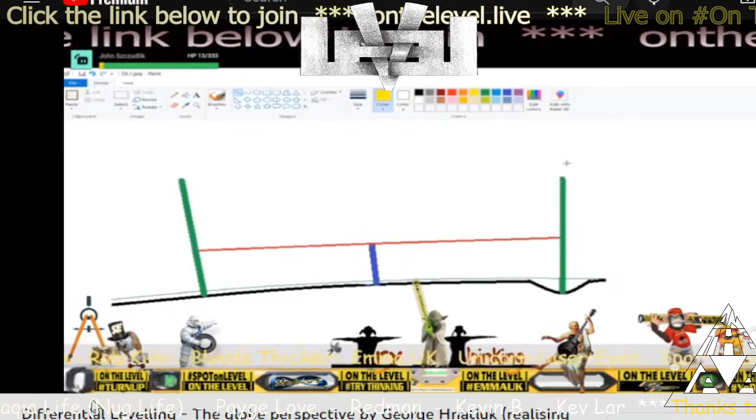Okay, so what we have, the green are our two rods, our grading poles. They have marks on them. In the UK, I don't know what you use for graduations, maybe 5 millimeters. What are your grading poles marked at, finest resolution, Bev?

On the backs of them you get millimeters, but if you're after really accurate stuff, you've got millimeters on the back. So they will grade it down to a millimeter? Yeah, but really close, you have to do that. In the US, they're usually centimeter or half centimeter, or generally marked in hundredths of a foot, which is about 1/8 of an inch.

So, okay, these are our two grading rods in green. The auto level is the blue in the center here. And in differential leveling, the easiest way is you set your auto level midway between the two poles. You don't have to for differential leveling, but by putting it symmetrically between the two poles, the curvature of the Earth drops out, and you also end up minimizing refractive effects, and I'll tell you why that's going to happen here in a bit. So you have your auto level set up, and now you can spin the scope around.

You can shoot in this direction to the left, which we call the back sight, or spin it 180 degrees and shoot in the forward direction, which we call the foresight. Now, with the auto level set up and the compensator moving freely, you shoot a straight line, and you are guaranteed when you look through the scope on the back sight to the left pole and read the mark there, then rotate and go to the foresight and read your mark on the pole, that these two marks the auto level is sighting are at the same elevation, or at the same level.

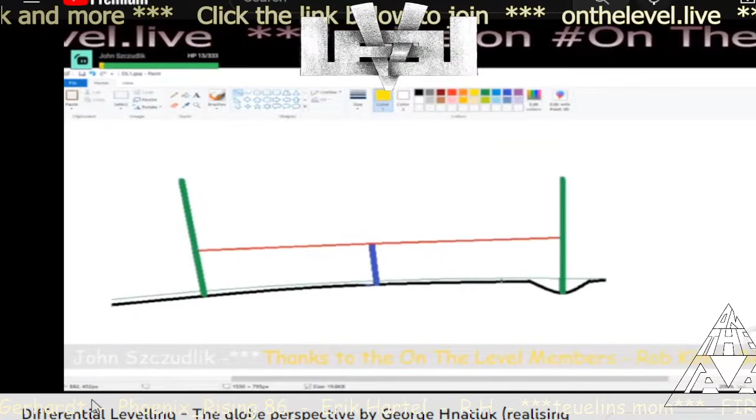Now, what I'm showing here in black is, let's say, our ground. It has a little depression here, a little dip, but this is our ground level. Now the thin green line is a level line, just above the ground. This would be, say, if you laid a hose along there. I know this is going to bother you because it's curved, but this is a level line on the earth, such that if this were a hose and you filled it with water, the water would just sit in the hose. It would not flow. Even though you think it's on a hill or whatever, that's not the way it works on the earth.

Is everybody getting this? Like it's the first time I've interrupted. I don't want to interrupt George, otherwise Blue Marble Science might say I'm spoiling the flow. But this is George going over his way of solving the horizontal paradox.

Get into any conversation with anybody about how surveying techniques are actually done in reality, and this is what the Blue Marble scientists do. I'm pretty sure George must have done this for Blue. Blue sent George over to help Mobius out. This is George showing Mobius how differential leveling works on the globe model. We all know how it works in reality, but this is George going over it on the dogmatic globe model.

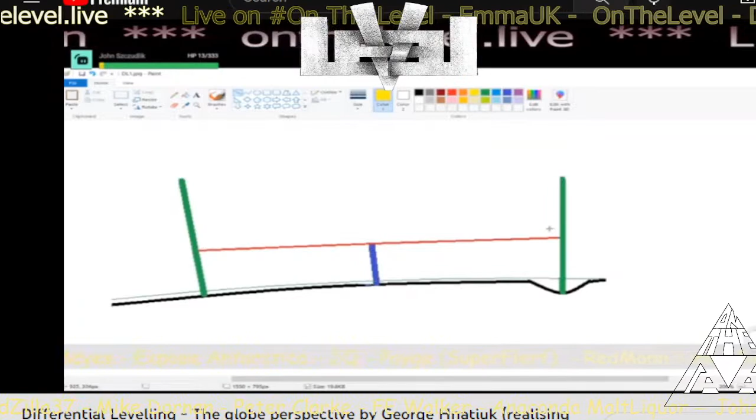I'll let him continue. That's level, right? When you shoot these two marks on your pole, if I were to say, see, measure the distance shown in yellow from where the auto level is sighting on the pole to a level line on the ground.

And I look on this one too. The distances are guaranteed to be the same, even though the Earth curves away from the auto level in both directions. The fact that the auto level is in the middle, we get the same drop distance on the right here as we have on the left here.

And what that does is, in differential leveling, this is a differential. We're comparing one side to the other side. And we are guaranteed by symmetrically placing the auto level in the middle that the drop distances to where it sights on the pole is the same on both ends. So the Earth curvature ends up not being an issue. It drops out of the equation because we are guaranteed that these two sights, these two marks, are at the same elevation or the same level.

It doesn't matter whether you're on a flat Earth or a curved Earth or whatever, because of differential leveling. That's the beauty of differential leveling, is the Earth curve drops out and it doesn't affect your measurements at all. So you get that? Earth curve just drops out. So remember that, when using differential leveling with the horizontal plane, Earth curve drops out.

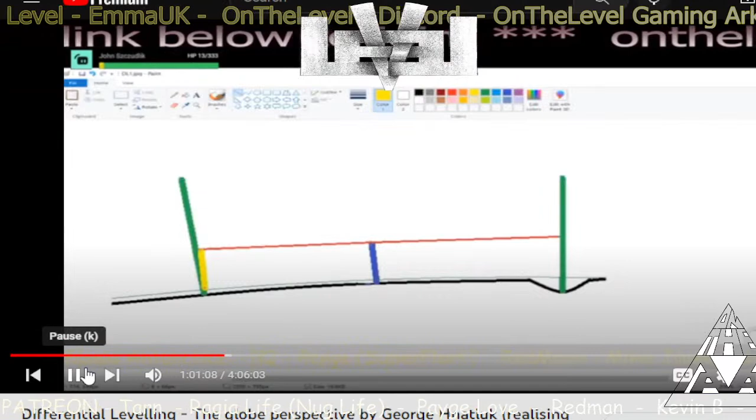The other advantage of doing this is that when you're sighting, say, in the back sight, the amount of refraction that you pick up is the same as the amount on the foresight because you're symmetrically placed. The atmosphere changes the same in both directions. So if you pick up refraction looking on your back sight, you're going to pick up the same refraction on the foresight and it cancels out. So in differential leveling, you have two advantages: you minimize refractive effects and the curvature of the Earth does not affect your measurements.

Now, let's... okay, so I'm pretty sure everybody's heard this one before, but George is just adding another one, that if you turn around, you can get rid of refraction too. They cancel each other out. Yeah. Same both ways, and the error cancels.

Blue Marble's confirming it. This is exactly like it has to work on the dogmatic globe model. Thank you for joining us, Blue. Yes, Kevin says.

Okay, here we go. Refraction cancels out. Brilliant. Magic trick works. Yeah, it's even if you've got like refraction going down in that direction and a refraction going down in that direction, they both just cancel each other out. They're both down, down and down. Just makes it normal or something. I've not got a clue.

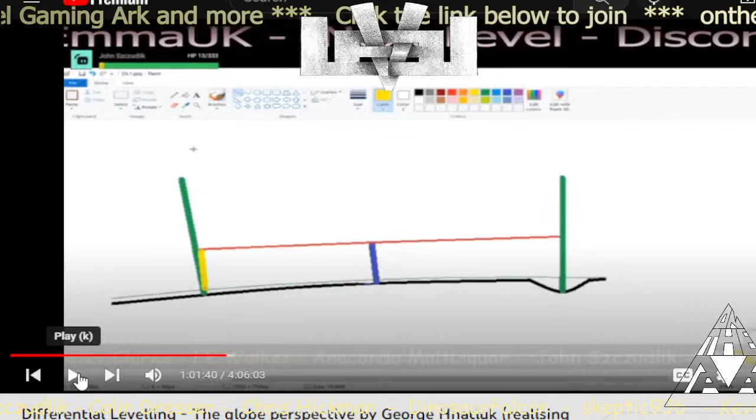So yeah, 32 times scope auto level. Right, here we go. Let's look at... any questions on that?

Hello? Have you got a fish tank in the background there, George, or something? A fish tank? Yeah, what do you mean? It just sounds like you've got like some water filling up or something. Is it? Oh, you mean the noise? Yeah, yeah. Oh, that was the furnace fan kicking on. Sounds like it turned off anyway. Mm-hmm, yeah, it's off.

So are we good on that part now? Well, I'm just going to reserve all my questions for later because I don't want to interrupt the flow. Well, you can at this point before I bring up the next graphic.

Did you say it didn't matter about the level being out of adjustment or something? Oh yeah, if your auto level is out of adjustment, you are guaranteed that when you do a backsight and a foresight, that you're going to hit the same elevation on both. Now, you don't want to do that. See? Even if it's out of adjustment, it's the same. It cancels each other out. It's brilliant, this. Just turning round. Doesn't half cancel loads of stuff out. Gets rid of curvature. It means you don't even have to set your auto level up or anything.

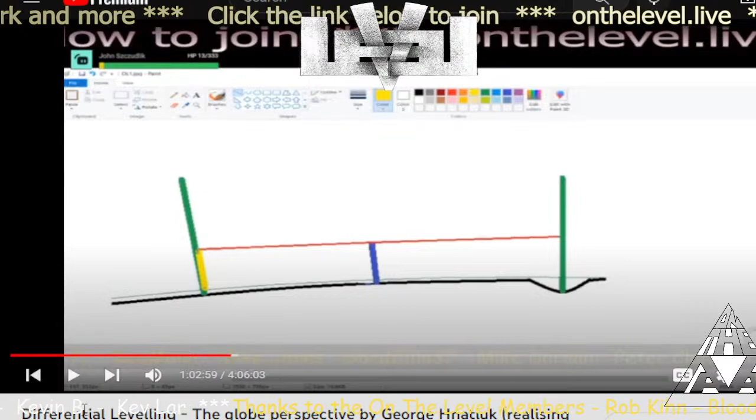Maybe you should turn around auto level many times. Yeah, perhaps you should do it when you're taking pictures as well. Cancel everything. 10 turns and you cancel everything. Turn around, take a picture in the opposite direction and cancel it out. It'll be fine. Get rid of refraction and everything in pictures. Really close, really good.

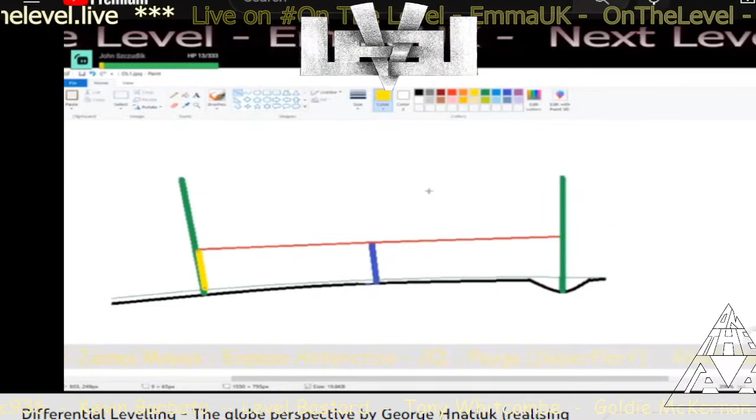So I wasn't trying to imply, Bev, that you can do this with your auto level being out of adjustment. That's not what I was trying to imply. All I was trying to say is that even if the auto level were out of adjustment and you did a backsight and a foresight where you're set up in the middle, you're still going to have the same elevation where it hits the poles.

Oh God, yeah, I'm sorry. I probably shouldn't have even said that. Yeah, don't worry about that.

Let's just assume as we're going forward that you can't adjust an auto level, and the auto level is set, calibrated, horizontal. We've already done our two-peg test, we've checked it, it is indeed calibrated, right? Then we don't need to worry about it being out of adjustment, because it shouldn't be, should it? It should always be bang on.

Right. You want your auto level tuned in as close as you can to be giving you a horizontal.

So we've just had to confirm with George that we don't need all of these checks, because we'll take it for granted that everybody knows how to do a two-peg test, and everybody knows that their tools are calibrated, and everybody knows that we've already done that and set it all up, because that's what we have to do first.

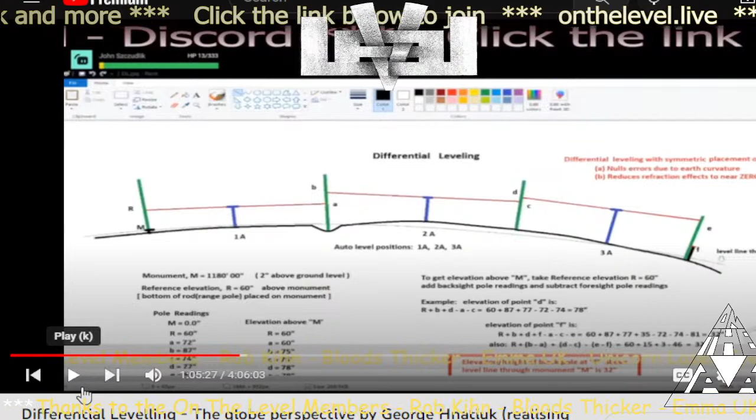I'm not too sure whether everybody knows how to set up auto levels, but everybody in this room pretty much does, because I've shown everybody and we've actually done it live. I don't think George really knows how to do it, and I'm not too sure Blue's ever done one either. Blue said he hasn't ever done it.

So anyway, the tools are set up correctly and always providing a horizontal. Here we go. Okay, so here's differential leveling. This is what Buster was interested in.

Okay, so what I put here in red is differential leveling with a symmetric placement of the auto level. One, it nulls the errors due to earth curvature, and it reduces refraction effects to near zero. I went through that.

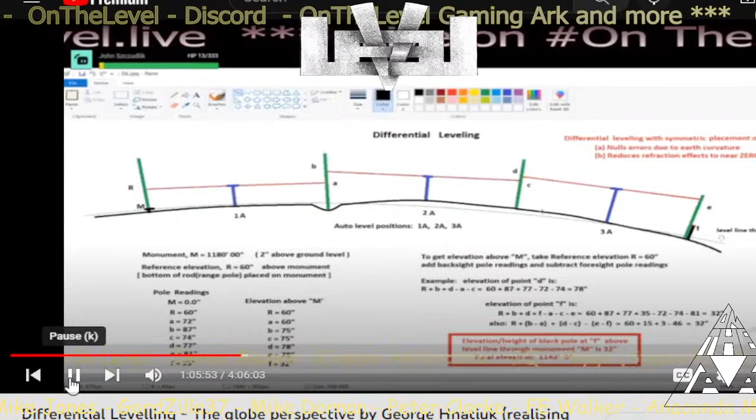Okay, so let's say we start. We're going to move ahead in three steps with our auto level to try to do differential leveling. Now, the whole purpose of leveling is to transfer a known elevation to other places on the earth. You set up a reference, I'll call it R here, a reference elevation, and you just want to transfer it forward to other spots on the earth to establish places at the same level or the same elevation.

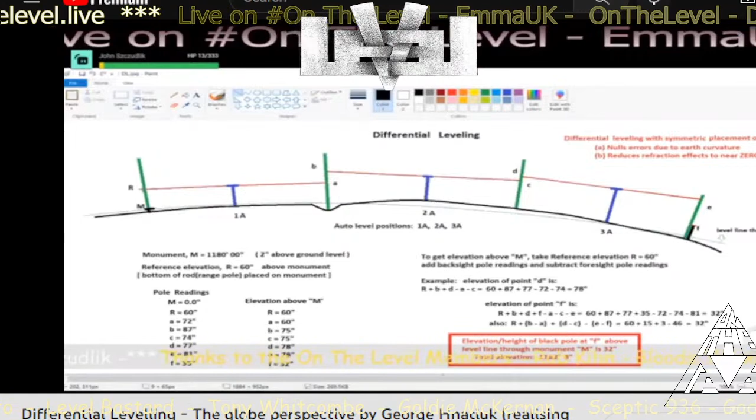Now, that's one thing that surveyors do, but they do much more than that. Particularly in this country where I'm at, people have a lot of hunting grounds and stuff, and they need to establish boundaries. In fact, the surveyors where I live spend most of their time establishing boundaries rather than doing leveling. Construction companies have their own levels and people that operate levels, and they don't need surveyors to do that. They'll be doing grading and leveling and stuff.

As far as professional surveyors go, their primary job around here is establishing boundaries, because that's a legal thing that needs to be established, and they need to be able to sign off on legal documents regarding property lines and stuff like that. So most of their time is used in establishing boundaries rather than doing a lot of leveling.

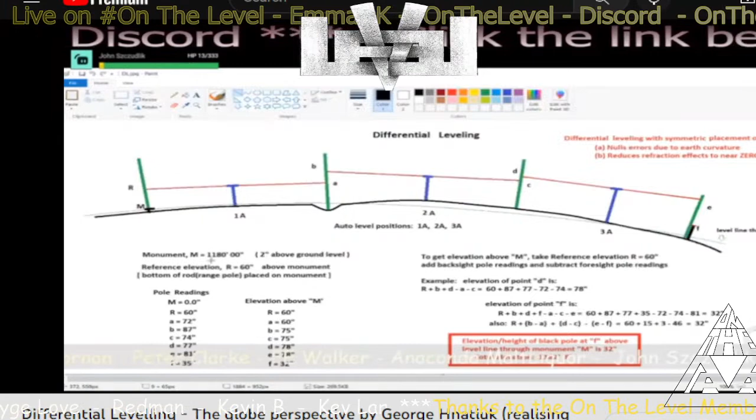But the differential leveling procedure is this. We set up our auto level at position 1A. The black thick line is the actual surface of the ground, and this thin blue or green line is a level line that goes through M. M is our monument, a peg we put in the ground at a specific known height. Surveyors call that a monument. For purposes of illustration, the top of the monument is 2 inches above ground level, and point M is at 1,180 feet, 00 inches above sea level.

That's our monument. Now we want to transfer an elevation at R, which is at 5 feet or 60 inches above the monument. So from the top of the monument to this point on the reference is 60 inches. What we want to do now is transfer this elevation as we move forward along the earth, and this is how you do it with differential leveling.

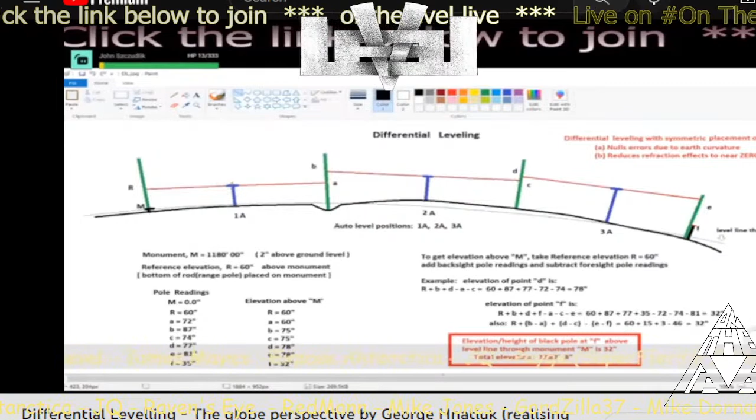Now we have poles, two poles: this green pole and this green pole. This is our first step. We set our auto level in the middle, and we adjust the height of the auto level with the tripod and the leveling adjustment screws on the base, so we're shooting 60 inches above the monument.

We rotate our auto level around and shoot, noting the marking on the pole at the foresight. This is our foresight now, and the mark at A reads 72 inches on our pole. So our first pole reading is 72 inches. The reason it's reading more than 60 inches is because we've got the pole set down in a hole about 12 inches deep, so the marking isn't going to read 60 inches like it did on the other pole—it reads more, by the depth of the hole the pole is in. So we're reading 72 inches here.

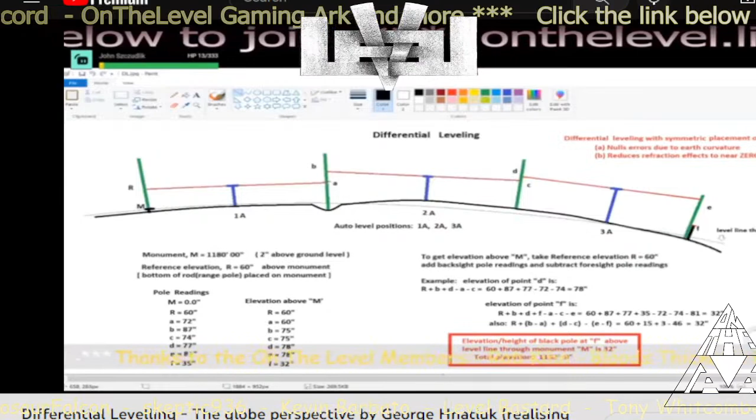Don't know why he put it in a hole, but we know that point A is at the same elevation as point R, even though the pole readings are different, because we're on rough or uneven land. So the pole reading is going to be different, even though A is at the same elevation as R.

So now we move our auto level ahead. Before we move it ahead though, again, it's midpoint—that is, the distance from the auto level to R is the same as from the auto level to A. That's what we mean by midpoint or symmetric placement. It's absolutely imperative, in order to cancel out earth curvature, that the auto level be in the middle between the two poles.

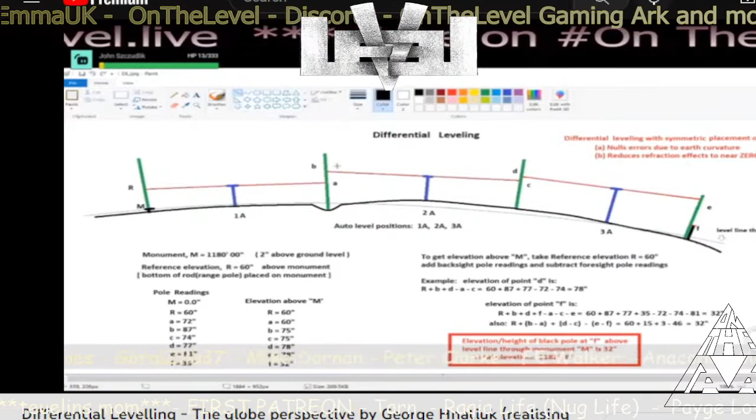So now we move our auto level ahead a certain amount, and measure the distance from the auto level to the pole. Then we can grab the pole we started with, or another pole, and move it ahead in the foresight direction again. Now this pole becomes the backsight for this auto level position. We put another pole in that's the same distance from the auto level as this pole is, so that again we're in the middle. Now we have our pole set up.

We swing our auto level. It doesn't matter how high it is, or the fact that it's on a hill or in a depression—we don't care. All we're going to do is shoot the pole on the backsight at B and note the reading on the pole.

And B, let's say now for sake of argument we're reading 87 inches on the pole. It's above A. A was at 72 inches. We're now shooting the pole on the backsight, and we're reading 87 inches.

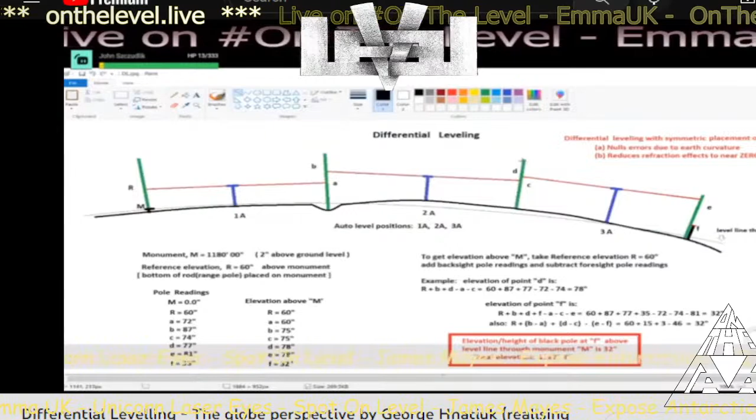We swing the auto level around, and now we shoot the pole on the foresight, and we sight C on the pole. And the reading on C is 74 inches.

We can see that the pole is a little bit on a hill compared to where B was. B was down in the hole. So the reading on B is going to be higher because it's higher up on the pole than D. D's a bit up on a hill. So now we're reading C, we're reading 74 inches on C on the foresight.

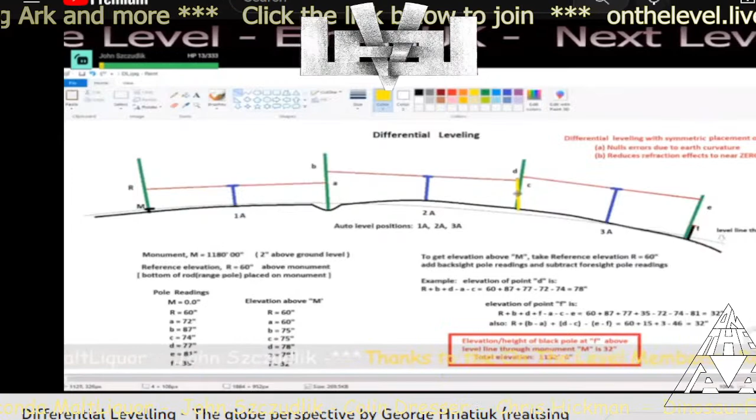So again, by having the auto level set in the middle, we can say that the drop on this elevation here to a level line, that drop distance is going to be the same as this drop distance, okay? The earth curvature is the same on both, so it drops out when we do a differential measurement, because basically what's going to happen when we're all done, we're going to be subtracting off these readings, and so any earth curvature drops out of the equation because we're subtracting it out.

Now we move our auto level ahead now to position 3A, and we measure the distance from the auto level to this pole and set up another pole that's the same distance away. So again, we set our auto level up. It doesn't matter how high it is, and we shoot the pole here on the back sight to D. And again, the auto level is shooting a straight line to D, and we read D, and it is 77 inches. We swing it around 180 degrees, read the pole at E, and we're reading 81 inches.

Okay, so now let's say we want to find what the elevation is of this black pole, the top of it at F, is. We want to know what it is elevation-wise. So we have our measurements.

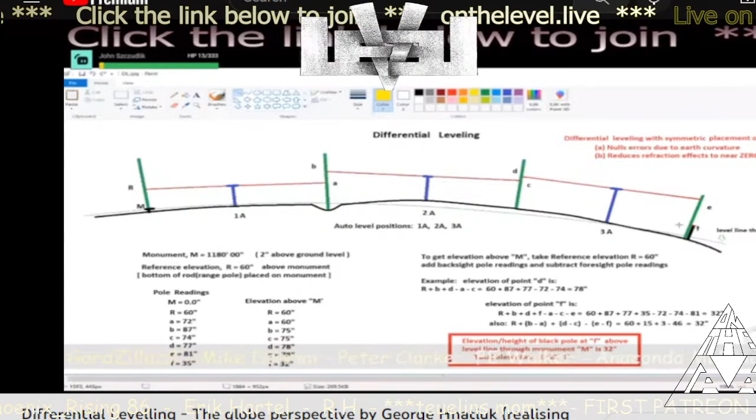The thing I didn't do here that surveyors have is a logbook, and they record all their backsights and their foresights, and I just wanted to kind of keep this simple without having a logbook, but Bev probably knows about it, and Mobius has probably seen them too. You have a logbook and you record your backsights, your foresights, and then when you're done, you can compute what the elevations are by adding and subtracting the pole readings.

And basically what you do is, if I want, since I know the monument is at 1,180 feet, and I know R is 5 feet above it, or 60 inches above it, let's find the height of F above the monument. The monument is our reference height. So we want to find out how high it is.

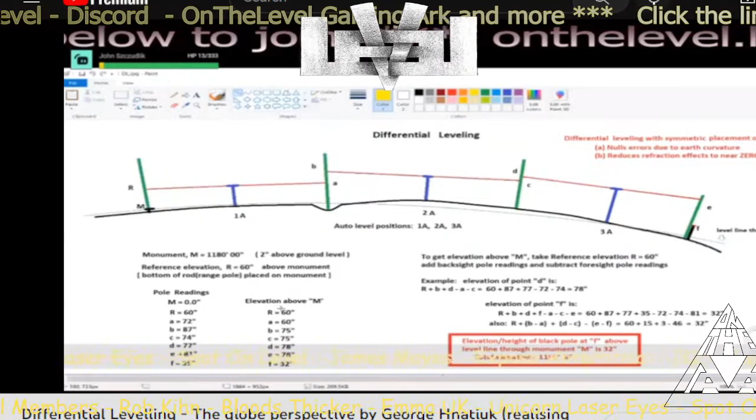Well, what you basically do is you take the reading that you start with at R, which is 60 inches, and you add your backsight pole readings and subtract off your foresight pole readings. And that's what I'm doing here.

For example, if you want to find the elevation of point D, this elevation, we start with 60. We add in our backsights. The backsights are B and D. And we subtract off the foresight readings, which are A and C. So we got R plus B plus D minus A minus C, or 60 plus 87, plus 77 minus 72 minus 74. And that gives us 78 inches. So point D, the elevation of point D, is actually 78 inches above the monument.

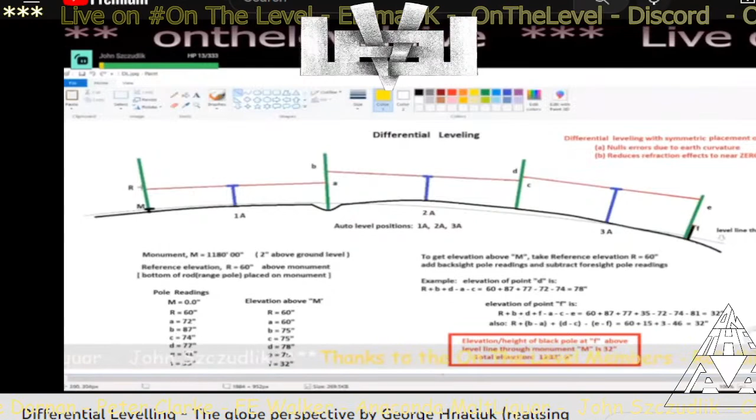But we're going to play it through for Blue. Now, let's find the elevation of point F. Well, point F is, we start with our reference, which is 60 inches. We add in all the backsights, B and D, and we look at the pole reading at F, which here I showed to be 35 inches.

That is, we have the pole next to this black pole, and we read on the scale that it's reading 35 inches. That is equivalent to a backsight, because if we have the auto level set here, we'd be shooting back at the pole. So we add in B, D, and the reading on F, and subtract off A, C, and E. And that's what I've shown here. And by adding and subtracting all these numbers, we get that the height of F above the monument is 32 inches. Now, this might seem a little confusing.

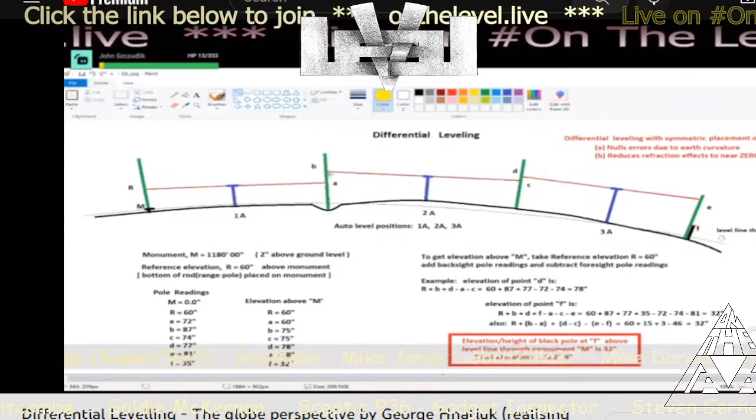Basically, all you're doing, if you look at what's going on with backsights and foresights, we start at 60 inches here. We know that point A is going to be at 60 inches. So now B is above that by how much? Well, the gap between B and A. It's B minus A, that is that height right there. Yeah, let's change that to black so it's more distinct.

So this gap here is the height difference between B and A, that's B minus A. So we take R plus, if you look here, B minus A, that's the height difference.

Now when we move our auto level ahead and we shoot B, then do on the backsight a foresight to C, we know that C is going to be the same height as B. So now we can look at the height difference between D and C. D minus C is that gap distance.

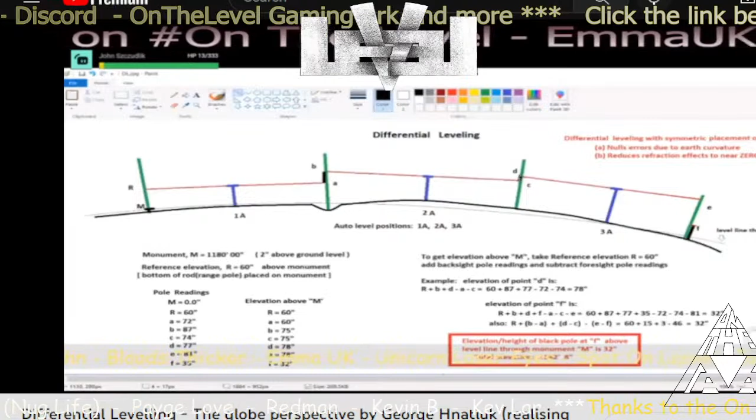So we started with R at 60. We've gone up this height, B minus A. We've gone up another height, D minus C. That's what I'm showing you here.

And then when we move our level ahead, we shot D, and we rotate 180 to shoot the point E. So E and D are going to be at the same elevation. And so what's going to be the height of F? It's going to be the difference between E and F, and lower.

Rather than adding, we subtract that off. So we're subtracting this height difference, E minus F, which is there.

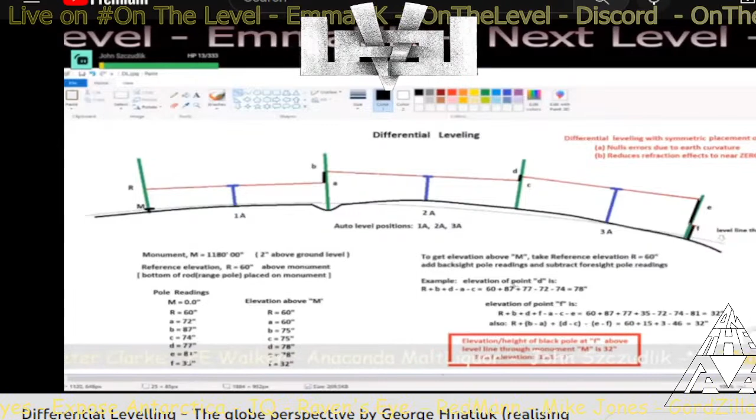So basically, by adding in your back sight pole readings and subtracting off your foresight pole readings, all you're doing is accounting for these differences in heights in the gaps between when you've moved the auto level forward and backward.

So that's basically all differential leveling is: you're assuring that the auto level is in the center. You do a backsight, foresight, that nulls out your earth curvature and reduces your refraction.

So if you wanted to find, say, the 60-inch point by knowing the reading on D, and we know the height of E, the elevation above the monument for D, by going through the back sight and foresight readings on the pole, I can establish that D is actually 78 inches above the monument.

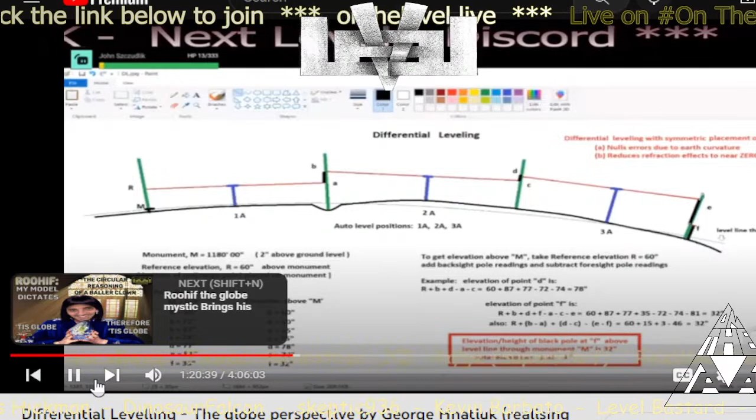So if I want to be at the same height or the same level as R, which is at 60 inches above the monument, I know I have to drop down 18 inches because D is at 78 inches. And if I drop down 18 inches, then I know that this spot here is going to be at the same height or the same level as the reference point.

So that's basically it.

So did Buster have something more?

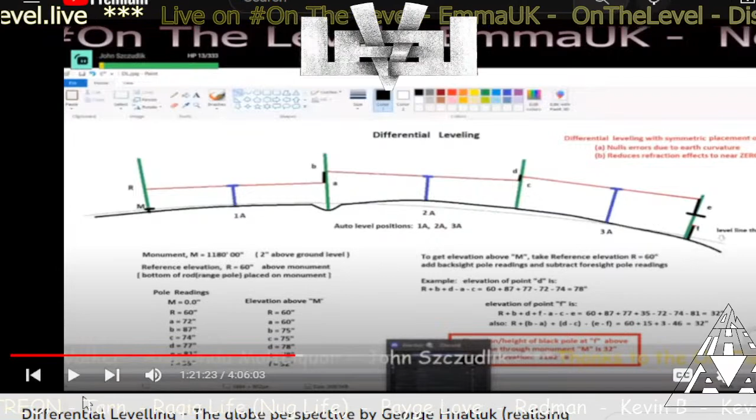I think I should say, Blue, you did say that George did this for a joke to us. I don't think you knew. This is one of those things. Blue, George must have talked to you about this. There's no way that George made this presentation and didn't talk to Blue Marble Science about it. He came round here specifically because Mobius had asked Blue, how does differential surveying work? And then George turned up round here wanting to tell Mobius how differential surveying works on the globe, on the dogmatic globe, not the real globe, the dogmatic globe. So, as far as we're concerned, it was Blue Marble Science that sent George round to do this. Now, nobody else wanted to do this, and nobody else has ever wanted to talk about this.

This is geometric leveling, differential leveling, as occurs in reality. Well, the differential leveling procedure is what happens in reality. You might have seen it. It's how we know the elevations as marked on elevation profiles to relate it to reality.

So all of these three lines here, they're all horizontals set by these auto levels that he's got as little blue things.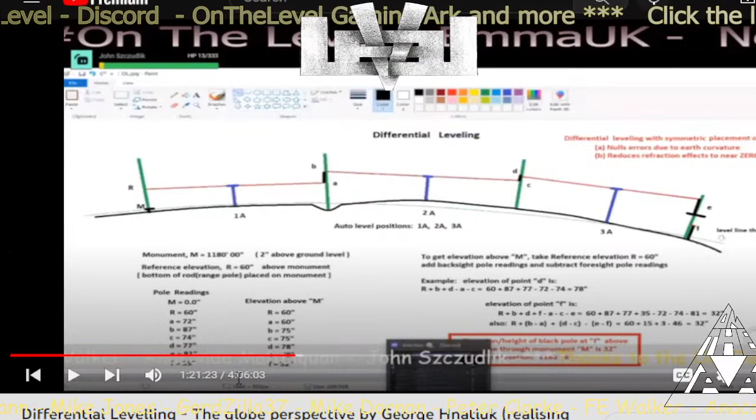Now, I don't expect any surveyors to come into this arena because everybody knows what does happen to people, genuine people, whenever they come into this arena.

This is the only recording of any globe, dogmatic globe Earth believer to have an attempt at solving the horizontal paradox. That's what George is trying to do right now, for Blue, I think. He was helping Blue up. This is the first time you've ever seen it.

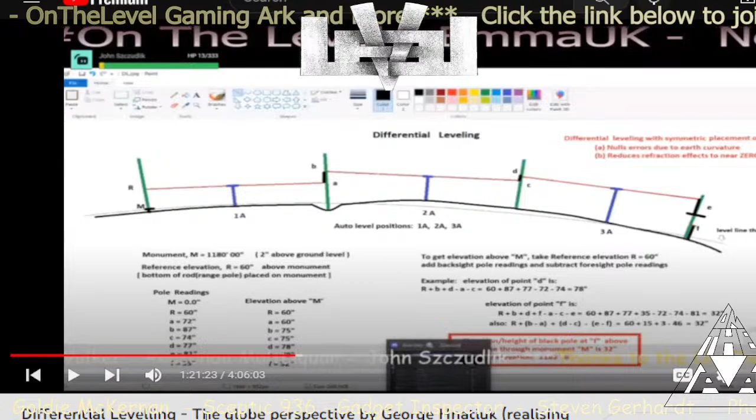Blue Marble says in the chat, this is the first time I've ever seen the presentation, Bev. Wow, that's surprising. George had lots of fun with you guys, but this time he was actually trying to teach us something.

Doesn't appear to have worked. Blue Marble Science is stating that this is the differential leveling procedure that would have to occur on the dogmatic globe model. Blue Marble supported, Blue Marble Science supported. So it's going with George. This is what George was talking about.

Well, nah, yeah, I was just wanting to hear you say it. I saw the diagram, and so you can't get the difference of your foresight on a pole until you move up and do the backsight to the former foresight.

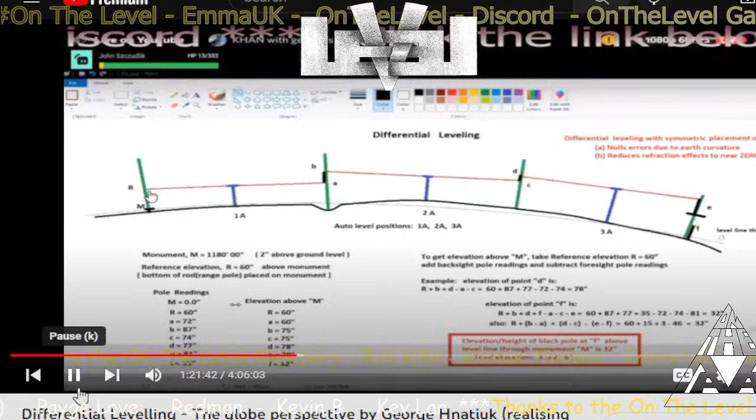Pardon? Run that again? Yeah, the height difference, I mean the height differences. Yeah, you have to move. I mean, yeah, you have to do another setup.

And now, of course, I could, if I wanted to take the time, I could have done this sort of thing. I'll mess up this diagram. Suppose what I could have done is I could have taken the time and adjusted the height of the tripod and the tribrach of the auto level and shot the same spot like that on that step, and then done the same thing here with this one.

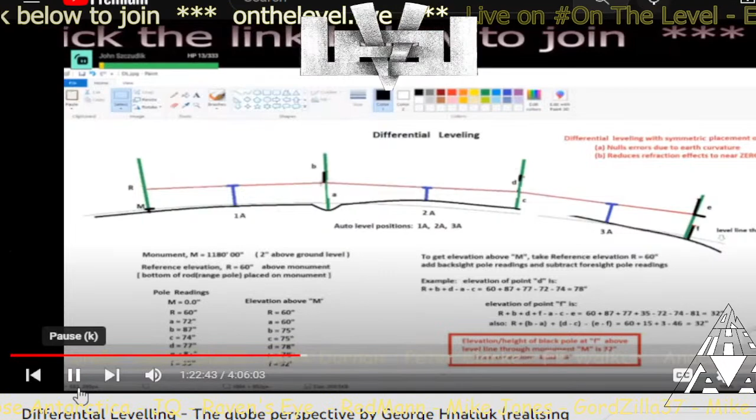Then all I'm doing is following a level line. R has been transferred to here. So this height here is going to be the same as this height here, as the same as this height here.

If I happen to line up my marks, taking the time to adjust my tripod and the tribrach base on the auto level so that I'm on the backsight, I'm shooting the same mark as the same foresight, the previous foresight, then I'm guaranteed that this elevation, this elevation, this elevation, and this elevation are all the same elevation at 60 inches.

But, you know, for sake of... go ahead. Oh, that's fine, I get what you're saying. I thought at the beginning you said you were transposing the same height of M to F.

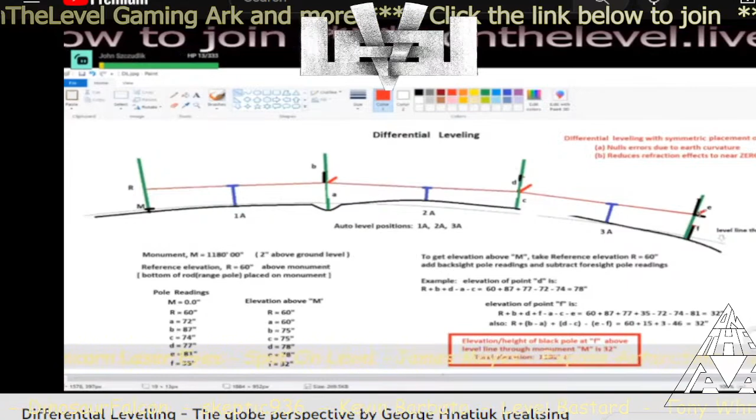No. What I wanted to do initially is find out what the elevation of F was. Okay, that must be my mistake, I thought you said you were transposing M to F. No, M would actually be right about here.

If I were to transpose M, it would probably end up being right about there. Okay. Or no, it would be, I'm sorry, not there. It would be right on the green line. Okay.

Yeah, that was all I had. That's it for me. If anybody else has any, I'll go on mute.

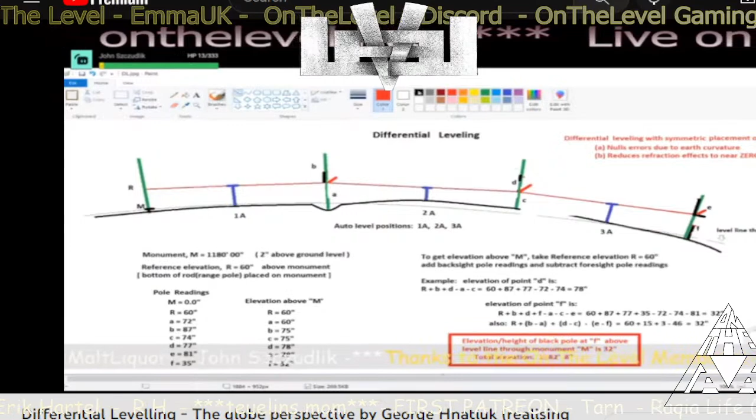Get rid of that, he's only just learned paint, I think, at this time. He's doing all right. If I were to actually be transposing M, it would, when I'm all done, M would end up being there. So I was just trying to find...

Well, back to the original, like don't they, like a lot of these tools, they say you can do a double run to get back to the same spot. Well, that's a different thing. Oh, okay.

That's for checking the instrument. Okay, let me... It's not for checking the instrument, it's for checking whether you've got everything right. So you should always do a double run, you should always go back again to make sure that you've done everything correctly.

I'll get rid of this here. Hang on. Don't know, let's say what you're talking about is we're doing a top-down look right now. This is a top view. Let's say we start here, and we want to end up here. Okay, mm-hmm.

Now, there's really no set standard on this, as in how many setups you need to do. Typically, people do about 10 setups on a double run. And basically what it's telling you is that if I set up my auto level, say starting here at A, and I want to...

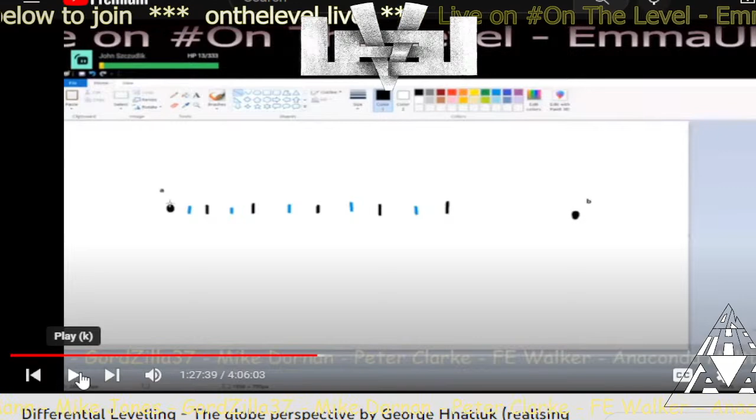No, sorry, I'm going to have to stop it again. Blue, I said he hasn't shown it to you. You are the one that said you've never seen it. What are you talking about? You said he shouldn't be showing it. Who said that? You, Blue. You've just said that. I never said that. I said George has never shown you this.

So this is an On The Level exclusive globe differential leveling, you'll not see this anywhere else. George has never presented this to Blue Marble Science, the Blue Marble Science HQ, Geos, Gem Panda, or Fight the Flat Earth. He's never presented this anywhere. There has never been any documented display of a dogmatic globe differential leveling like this, and it's still unfinished. If anybody out there, globe guys, dogmatic globe guys, can help George solve this horizontal paradox problem, then please do.

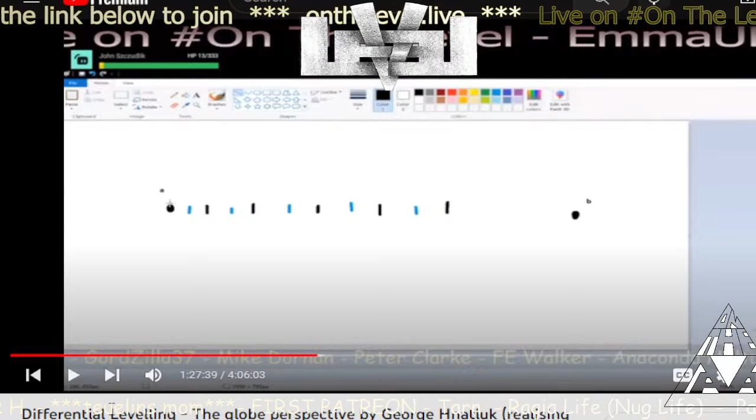We can set stuff locally. It's very easy to set something locally, and then we have a mean. It's a bit like frequency with concert pitch - we have a mean concert pitch, but also the individual frequencies of every area. For elevations in the UK, we just have a mean sea level, just one. Yes, but that's just the UK, so we can't compare ourselves to anyone else. But we're just talking about differential leveling here, not across continents - we're sticking to local differential leveling.

Sweet, cheers mate, appreciate it. Cheers. All right.

Listen and learn how they do it on the globe. Make a mark on our pole here at A, and we swing around - you're talking about the globe - make a reading. This theodolite cannot measure accurately up and down, it can only measure accurately left to right. We're talking about auto levels, and differential leveling on the dogmatic globe here. That's what Georgie's going over.

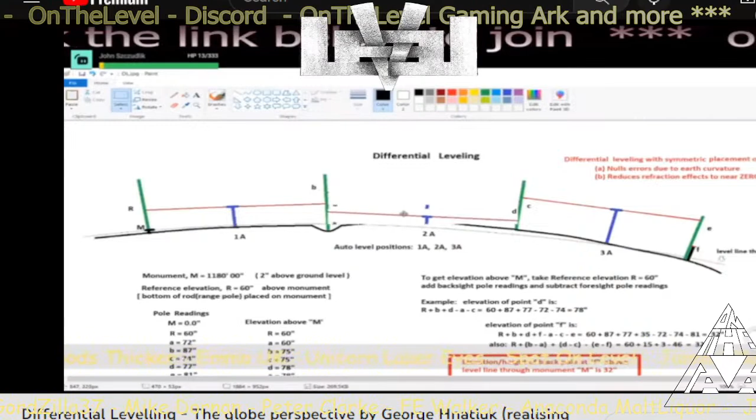Now, let's take this one and say instead of shooting higher than A on the back sight, we're shooting lower than A, something like that. What happens? Let me get rid of this.

What happens is when we add the back sight, that would be this number, and we subtract the foresight, we get a negative number, right? Because this one's lower than this, that tells us we're shooting lower. This distance, if I start off at 60 inches, I got 60 inches, say.

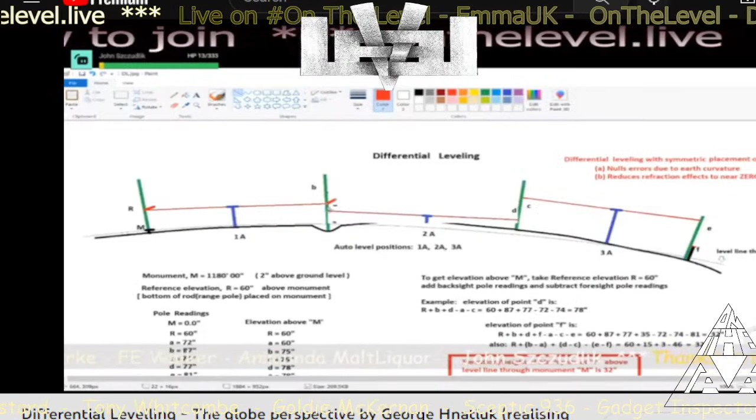I'm starting off with 60 inches here on the reading on the pole. And this pole reading here was B, which is 87 inches. Now, if I set my tripod lower than that, so I'm shooting below this point, let's say I might be reading 80 inches. So if this was 87 inches, and here we have 80 inches, this is actually 7 inches lower.

So our back sight is 80, we add that, and subtract off the foresight, which is 87, so we end up with minus 7 inches. So we start out with 60, add in 80, subtract off 87, so we get 60 minus 7, or 53 inches. So it all comes out. As long as you're adding in the back sights and subtracting out the foresights, the numbers all work.

What do you end up with at D and C? Does it work out at the end? Like what you've changed, will it still work out at the end at F?

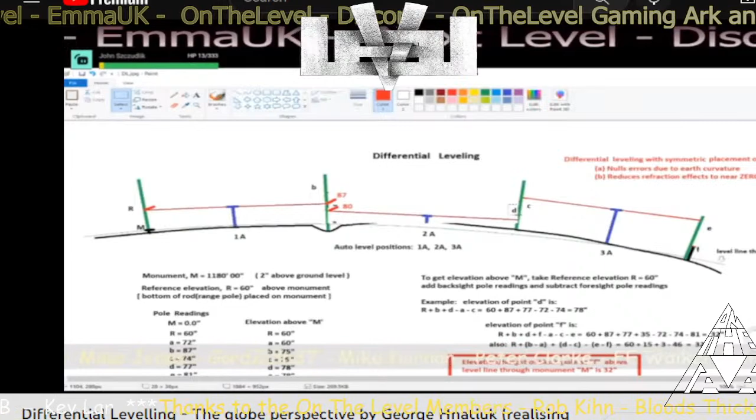Sure. Because now, let's say my D, it's got messed up here. Let me just get rid of that too. So my D is still here.

George, while you're doing that, can I just get a clarifier? Is the double run, is that the same as closing the loop?

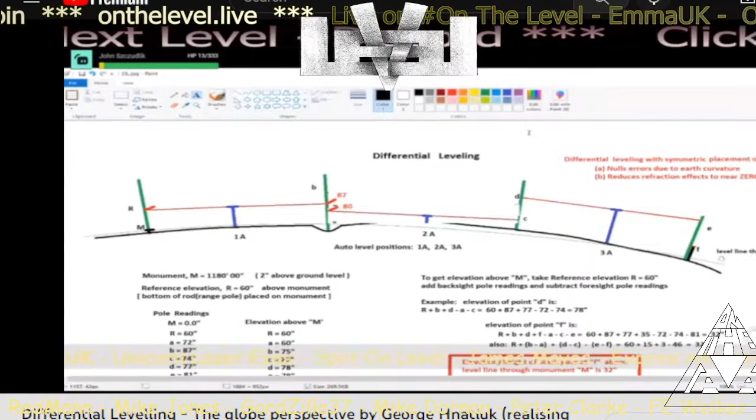Yes, it's exactly the same principle. That's what they mean, double run. You go out and you come back, you're closing your loop, and then closing your loop checks the accuracy of all your measurements over that run. Basically it's to check how good you are as an operator as well as how good the auto level is. There's two sources of error that can creep in: one is if your auto level is out of adjustment, and the other is how good you are as an operator in sighting the pole and estimating between graduation marks. So it comes with experience.

The more experienced you are, the less operator error that's liable to creep in, right? Look at the experience that we've got.

Okay, so back to this, D was at 77 inches, but C now is going to be much lower in this case than 74 inches. It's going to be maybe down here at around 30 inches or whatever. So C is the foresight, D is the back sight. C was 74 inches when it was up here. So now it's way down here.

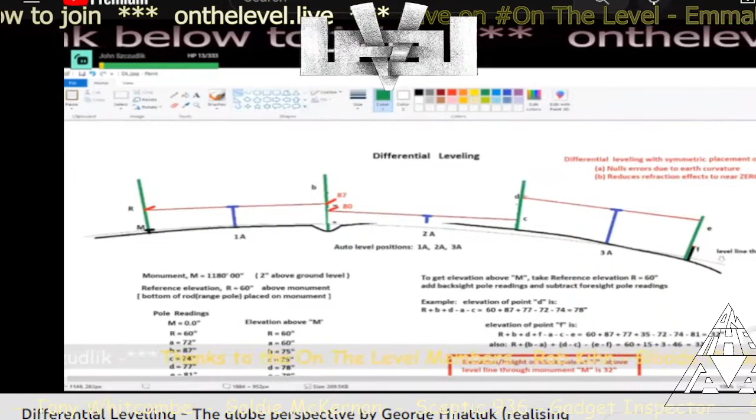So it's now 7 inches less. So 74 minus 7... wait, it's only 7 inches left on this side. Well, it would be the same 7 inches though. No it won't -- well, it's the same 7 inches with respect to something here, but not with respect to D. Oh, okay, no you're right, I'm sorry. Since this just dropped down 7 inches, you're right, this will drop down 7 inches too.

My mistake, you're right. So C now will be at 67 inches. It was 74, so now it would be 67 inches. So when we subtract the foresight C from the back sight D, we end up with a gap of 7 more inches, right?

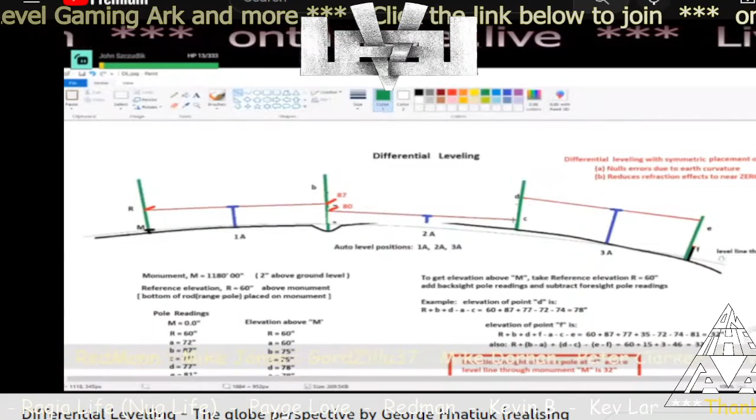So it all works out in the wash. As long as you note your pole readings down correctly by starting with your reference and adding your back sights and subtracting off your foresights -- if you study this section where we're adding back sights and subtracting foresights, and group them appropriately -- all you're really doing is either adding the height difference or subtracting the height difference, depending upon whether your next setup is shooting higher or lower than the previous mark.

You're just adjusting for these height differences. I was just wondering, when we changed that, you went from 87 to 80, and I was wondering if you could work it out to the end, if it still ends up the same.

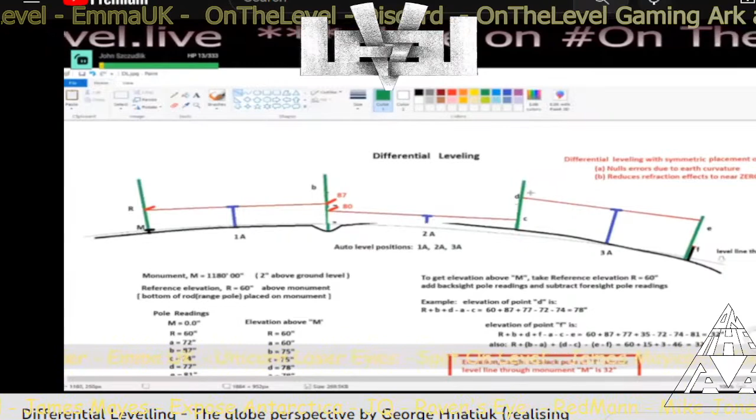Well, let's look at it. Let's go through the numbers. Okay, that'd be awesome. We agreed that D hasn't changed, right? So D is at 77 inches. I'll mark it down here. This is 77. That's 77 inches, right? And we've agreed.

Let's see, our A was at... what the hell? Oh gosh, here, let me start over.

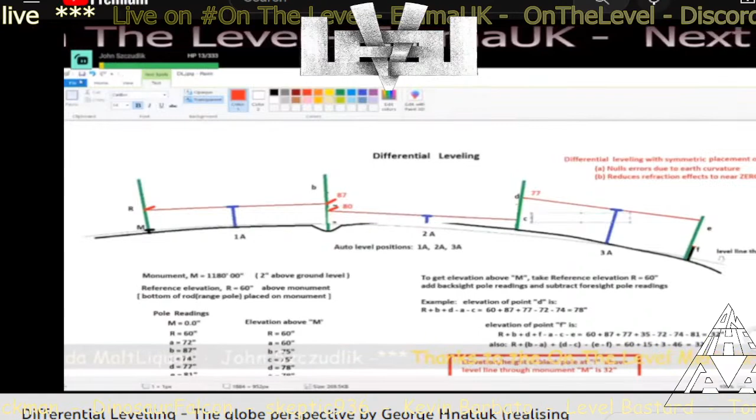You still with us? Everybody's still with us? George is... you still with George? You know what he's doing? Sounds like he's a well-experienced surveyor. And like, who could have thought that he might have possibly practiced this? Blue Marble's never seen it. Yeah, I know, Mike, you're right. He should have at least let George go over it first to make sure he had it all sorted.

Fancy going in blind without letting anybody of your mates know? Unless it was Rumpus. Unless he worked this out with Rumpus. I don't know, we'll never know. I apologize, here we go. Here, hang on. Let's do what you wanted to do and go through it again.

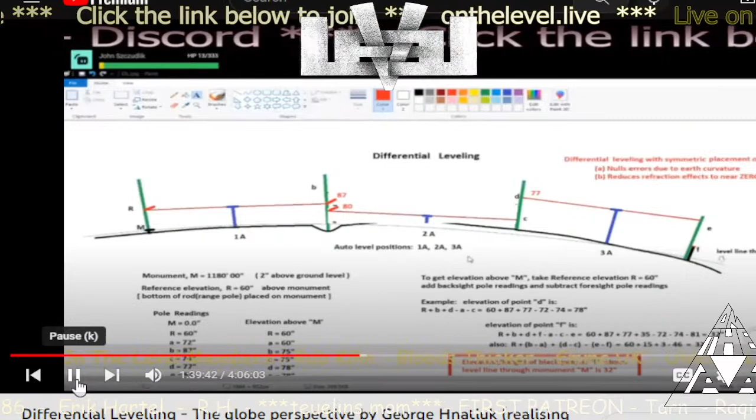Hey, good afternoon. Hey, Rob. You asked if we were still with you. Yeah, I'm in here, I had to jump in. It's good hearing George again, isn't it? I kind of miss the guy. Yeah, I know, you can sense the frustration in his own head. You can hear it. Yeah.

Yeah, this is what we call a nut sacking. This is what happens once you try and solve the horizontal paradox. In reality, it's a real thing. Yeah, you feel bad for him.

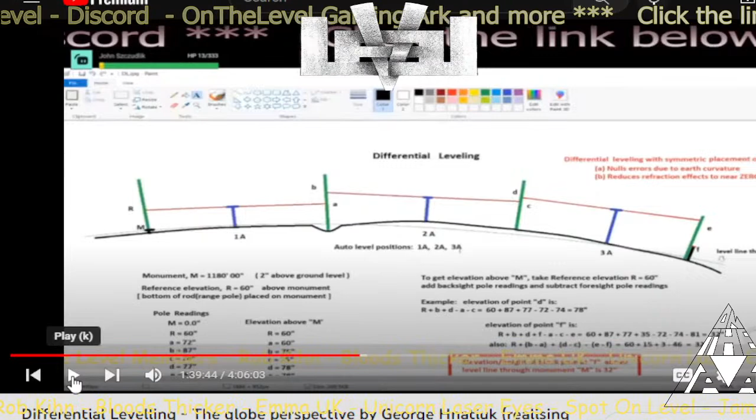Just struggling here. I don't know if it would have helped if Blue had gone over this with him, or Wally, or like you say, maybe Rumpus did. I don't know. If Rumpus is listening, lurking, maybe he can say. But clearly, poor George was left to his own devices here. Yeah, Jesse Kozlowski did a Jesse Kozlowski. The guy that probably doesn't live in Maine also did a Jesse Kozlowski, and they've left George here, role playing I think, left to solve one of the unspoken of paradoxes solo.

And just for me, because I really didn't talk to George very much at all, and I'm kind of new to the whole arena, was George a surveyor? I just don't know. It's an honest question. No. Oh okay, no, he had some tools. He's a bit like that Jesse Gordon character, he's got a few tools.

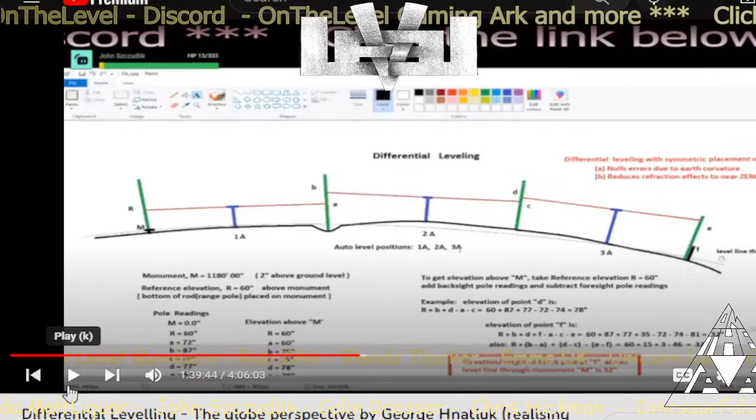Yeah, I think George once told us that he did a calibration. He calibrated, but he seems to know nothing about a 2-peg test or actual calibration. We've talked to George about all of these things quite a lot. And well, I will say I'm glad. Yeah, I'm glad to hear George was not a surveyor, because a surveyor struggling like this would be... Yeah, well, I mean, it's hard enough for a surveyor to talk.

Well, it's not really, it's dead easy for a surveyor. Go and listen to the Illinois surveyor, he'll tell you exactly how it works in reality. But this is special, this is dogmatic globe differential surveying. Extra difficult, it's really hard. And George is an experienced something in this arena, let's say. And yeah, at doing this.

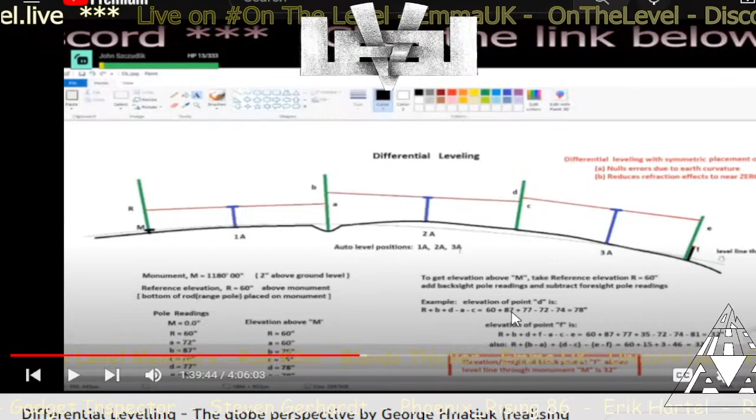Again, I have to remind you that all of these red lines here, they're all horizontal, established by a level. This is leveling on the... you may ask yourself, how the... that doesn't seem right. Well, trust your instincts. This is dogmatic globe differential leveling.

Here we go, okay, let's go again. Starting it again. Okay, this is what we originally had. All right, this is Buster I'm talking to? Yes. Okay, because I don't have the Discord up, I can't tell who I'm talking to. I just go by audio. That's okay. Okay, so this is our initial setup.

Okay, our A is 72 inches. Our B is 87 inches. So now we're going to move our auto level and adjust it. So instead of shooting high above A, we're actually going to shoot below A, right? We're going to do this sort of thing. Uh-huh.

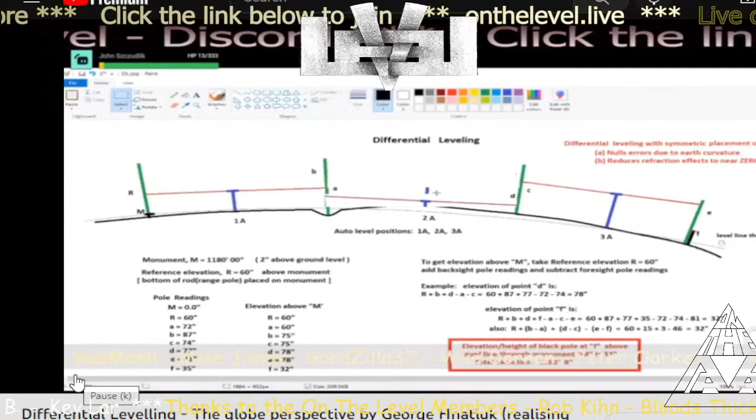Okay, now let me clean this up a little bit. He's obviously new to paint. I think I've never seen George with paint like this before.

On the fly, anyway. He's doing fairly well. I know that paint is not easy to do on the fly, if anybody's played around with that. There's a reason why that thing isn't out.

So this is our D, and this is our C here. D is still going to be the same as what it was, I haven't changed that. So we have to readjust our readings now for A and C. Follow me on this to make sure I don't make a mistake. Just clean this up a bit.

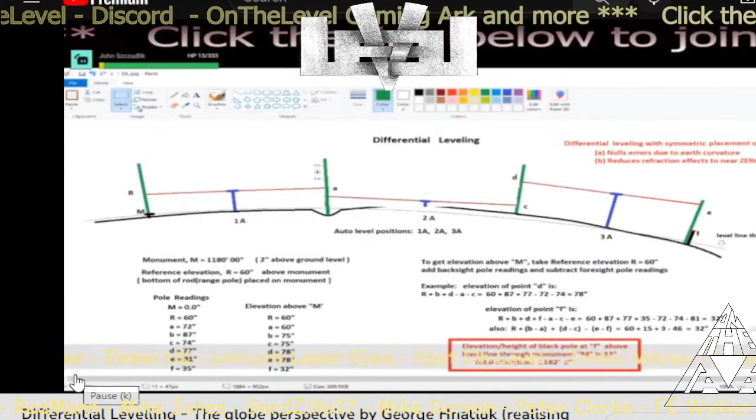Our B. Is anyone else getting deja vu? I was just wondering if the process you do would still work out to the same measurement you had. Yeah, it will, it has to. Of course it has to. Because otherwise, what good would this be?

Okay, so our A is the same as before, we're shooting the rod at 72 inches. Now I'm going to put a new number here next to B so we can keep track. Before, B was up here and we were shooting at 87 inches. Now we're shooting lower than A. A is at 72, let's say we dropped it 7 inches below. Is that okay? That's fine, I think that's what you were saying earlier. So if we drop it 7 inches below, we're actually going to be reading 65, right?

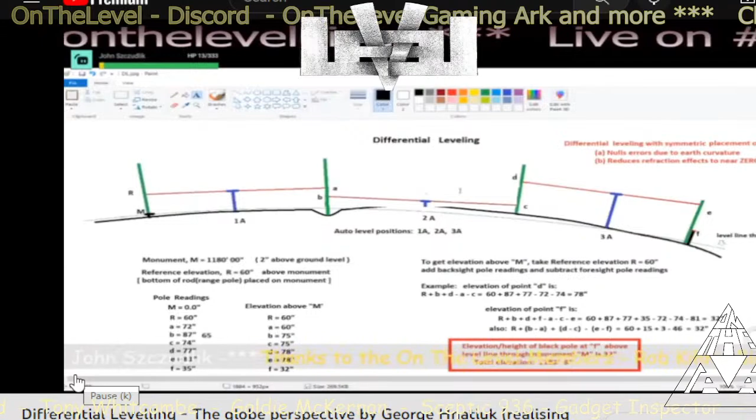For B, so B now is reading 65 inches. That's what I've got there. Are you seeing that in the pole readings next to it? Okay, so B is at 65. We've dropped how much? From the previous reading, we've dropped 22 inches, right? 87 less 65 - B used to be up here at 87, so we've dropped down to 65, we've dropped down 22 inches from what it was before. So we've dropped our auto level down 22 inches from the initial setup.

So that means C has to be lower than 22 inches than it was before. So C now will be 52 inches, right, if we're 22 inches lower. We've dropped B down 22 inches from where it was initially, so C also has to drop down 22 inches more from what it was. So if C was at 74, it now has to be at 52, right?

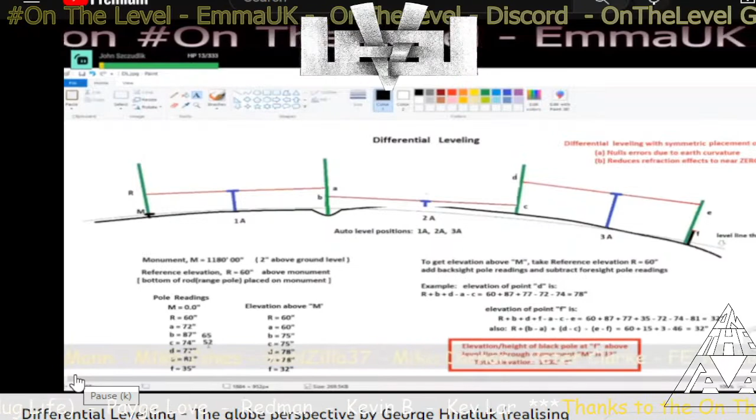I'll be honest with you, George, I thought that when you set your auto level up, you just take the readings off the pole, it wouldn't matter. It seems like with the way you've got it set up, you're getting the cart before the horse. No, we have to know what the pole reading is here at C, we just can't pick any random number, right?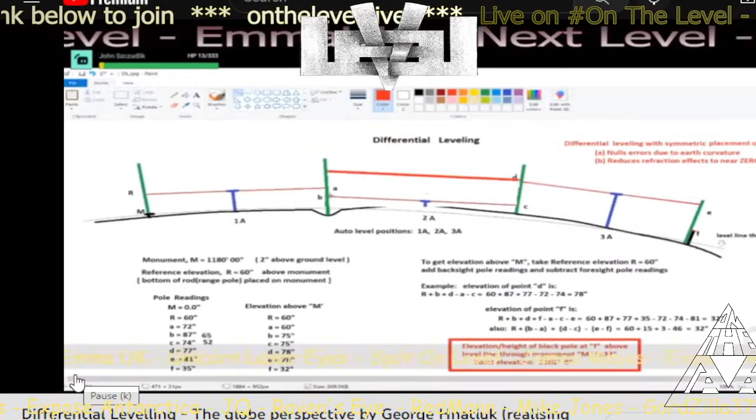Here, let me do this. Here's our auto level site. Initially our auto level site was there. So the difference from here to here was 22 inches, we dropped the auto level down 22 inches, right? Going from here to here is 22 inches, that's what we dropped it down. Because our new reading B is 65, and B used to be up here at 87, so we've dropped it down 22 inches.

Up here was 87. Well, at this point you'd have to change your equation, right? Like if R plus B plus D... See, now you have to change your whole equation. No, we don't, I'll show you why. First we got to make sure we agree on the numbers here, Buster.

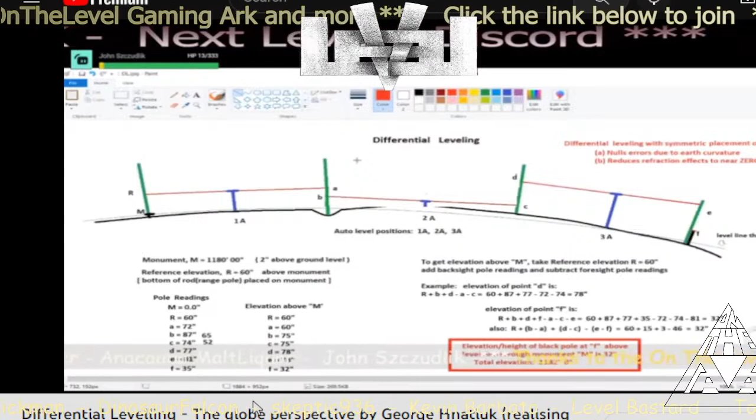Here, let me do this. You can't say in your equation R plus B plus D plus F minus A minus C minus E. Well, the way you've got it set up, you'd have to change your equation because now you've got R to A. No, it's backsights and foresights, it doesn't matter what the readings are. RBD... yeah, but if B is lower than A. But it doesn't matter, that's what I'm saying, it comes out in the wash, Buster. Yeah, but if B is like, if you're going through this process, it doesn't matter if B... okay.

I get what you're saying. You lower that one reading, but in real time, if you use that equation and go do 3 foresights and backsights, I was like, if I took your equation, I would be messed up because if my 2A was lower than 1A and 3A, then I couldn't use that B plus D plus F minus A minus C. Yes, how could you if B's lower than A?

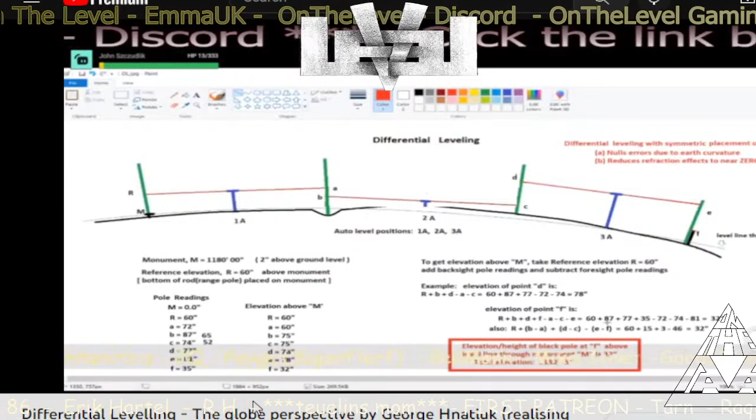I'll show you. Let's look at what happens here. Doing this equation now, our B, rather than being 87, is 65. So if I put in here, 65, and our C now, rather than being...

Has anybody ever heard George more in his element than this? He's loving it. I think he's totally engaged, right? Yeah, he's fielding questions. There's no yelling, nothing. Buster's being nice, trying his best to explain it. This is a nice diversion, because right in front of him there's a massive problem, but this bit is easing him into it.

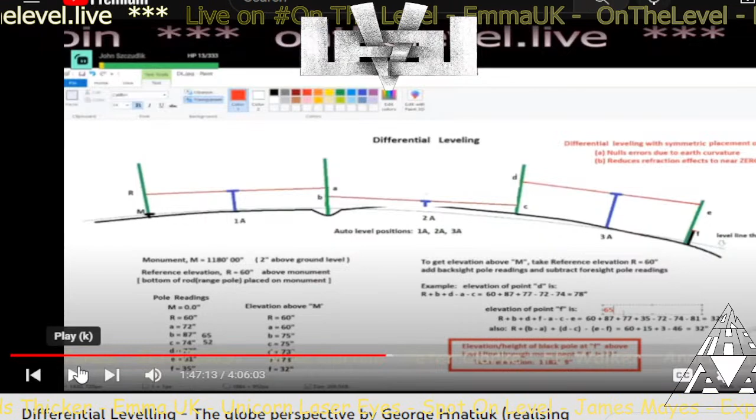What have we been going, a good hour and something? So he's at home. For all the people that say we were horrible to George, like Blue Marble said, we weren't. I think we were friendly to George. I was, anyway. I told everybody, we've got to keep George nice. You want George to do this. This is where George is in his element.

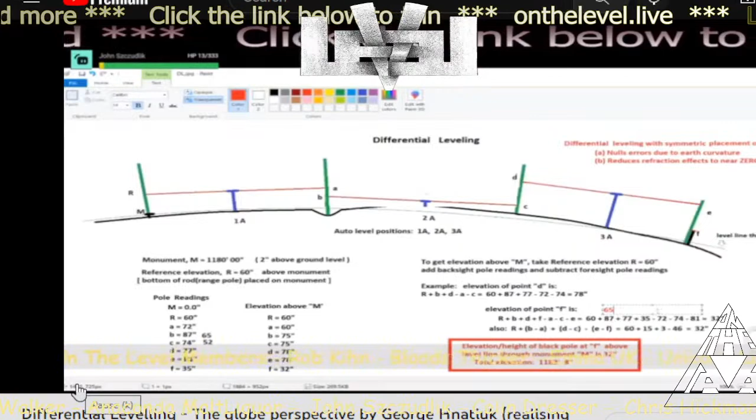Let's see, B, D... our D hasn't changed, so that's still the same, 77. So we're subtracting off A. A is 72. And now we subtract off our C, which is 52. So that number there is 52.

Now if we do that, let's add it up. We got 60... that's 202. I have 35, that's 237. Now I subtract off 52, that's 185. I subtract off 74, that's 111. And I subtract off 81.

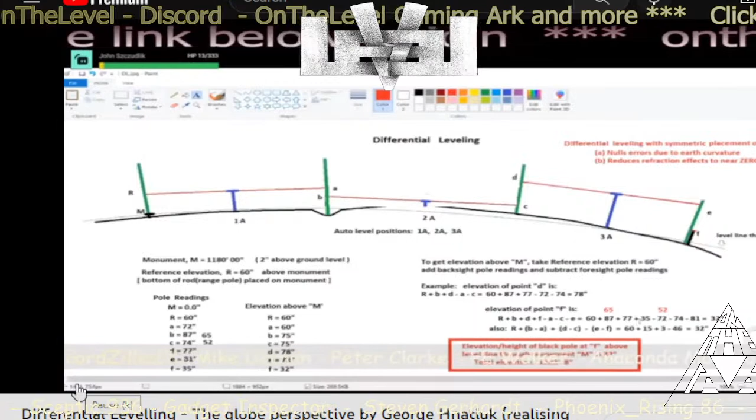Oh God, did I get the numbers? He can get the numbers right, he adds right, he might have got the numbers wrong. Does it really matter? No, but I think he thinks that. I can picture him doing a drum roll on his desk with his fingers because the numbers worked out and he was excited. Yeah, the numbers worked out when he did it before, and now he's adjusting the numbers on the fly, and he's like, whoa, super mathematician!

Look at this, C is 7. Oh, that's not C, I'm sorry. It's complicated, this surveying. So I got to move this over. I think George is the only one that's ever attempted dogmatic globe differential leveling. Do you see what I'm saying here? C is 52, the second subtraction, so this is definitely 52, because this is nothing like what would happen in reality.

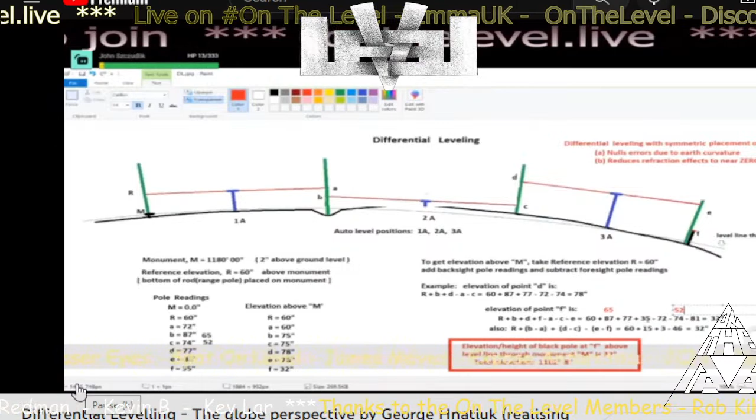Now if I add them, if I start with 60, actual surveying, fantastic. I add 65, add 77, that's 202. Add 35, that gives me 237. I subtract off 72, that's 165. I subtract off 52, that's 113. And now I subtract off 81, that gives me 32. So we get the same number.

See, it's like he could be a darts player the way he did that.

Same number, nice. I just always thought they went out and you set your auto level up, you got a pole reading, foresight, backsight, and then you would move and get your pole, foresight, and backsight. I didn't realize you would have to get your backsight to subtract from your foresight. I just don't understand how you would get your backsight lower than your foresight, like how you had it at first.

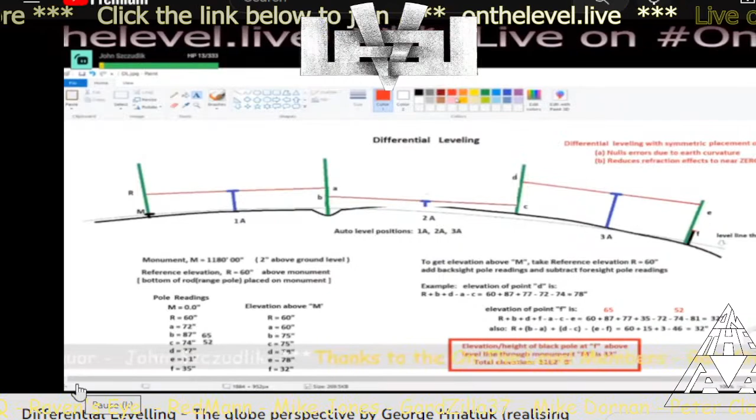No, the backsight is lower than the foresight. On this one, the backsight was higher than the foresight, the first time around. Well, how would... you changed the numbers, but you didn't change the equation. You don't change the equation. Oh, then it doesn't matter. No, you don't.

You would have to change your equation, the way you got it set up now. No, you don't. RBD face all the way, same equation, always. You have a record book, and you just record your backsights and your foresights. Then when you're all done, if you want to get elevations, you add your backsights in, and subtract off your foresights.

It doesn't matter. Okay, you have your log book for doing the backsights and the foresights. All you do is record the pole readings in those numbers. I think some of the YouTube chat might think that if you're doing a backsight, you put it in the backsight column. If you're doing a foresight, you put it in the foresight column.

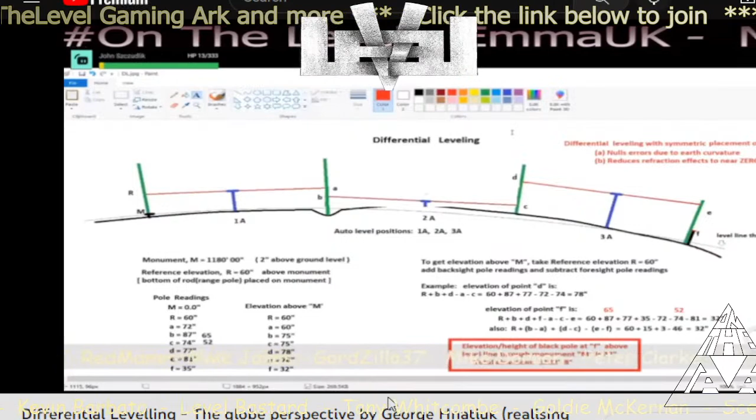He's got to warm up. This is global differential leveling, put all your poles. It's never been done before. You can't expect him to be full of flair. I mean, for sure, but you can't say it's not interesting. George is going all out on this. How do you say it's not interesting? Nobody else has ever done it before. How could you say it's not interesting? I know, I don't understand that. But to each their own. Yeah, I think this is fascinating myself.

Foresight, right, and it doesn't matter if the backsight or... go ahead. But like in the middle, now that we've lowered that auto level, right? If you're adding in the backsights and subtracting the foresights, and trying to work it out as middle. One at 2A, it's lower. Middle one at 2A, yes, it is lower, but it doesn't matter. The auto level's lower, so how does that equation still work if your backsight's lower than your foresight?

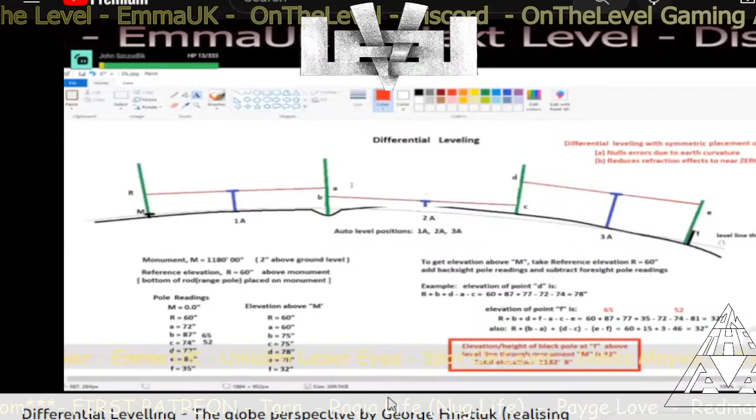Because Buster doesn't understand that it's RBD face. By adding and subtracting backsights and foresights, if we're subtracting the backsight off, or subtracting the foresight off the backsight, what are we essentially doing? At this point, if we take the backsight marking here B, which is lower than A, and we subtract A from B, we get a negative number, right? B, in this case, is 65 inches.

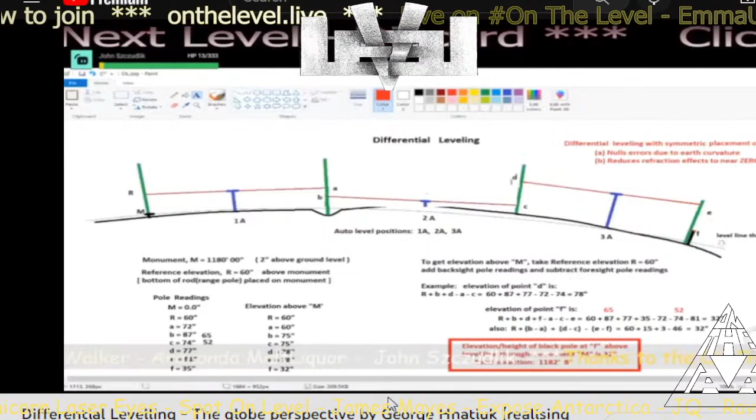A is 72 inches. So if B is below A, we're going to end up with a negative number, are we not, Buster? Yeah, that's fine, but you don't know for sure. Like your next rod sighting could be a whole different reading. You could have another divot at C and D. Yeah, that rod could be higher or lower, it doesn't matter. This is differential leveling. You're subtracting a backsight or a foresight from a backsight at each rod. This is what differential is, you're subtracting.

Differential means subtracting, so it doesn't matter. You could raise this whole pole up. Differential means you're noticing the difference between the levels, quite simply, because you're starting off with an elevation and then you're noting the differences between the levels to transpose that benchmark from one side to the other side. That's all you're doing, up or down. In reality, say if this pole were in a divot here, Buster.

Yeah, and as I understood it, again, I'm not a surveyor for sure. Right now we have two readings. But as I understood it, at D we're reading, all the levels would be parallel. And at C we're reading, right? Some would be higher, some would be lower, but they'd be parallel. Now let's say the pole's in a hole.

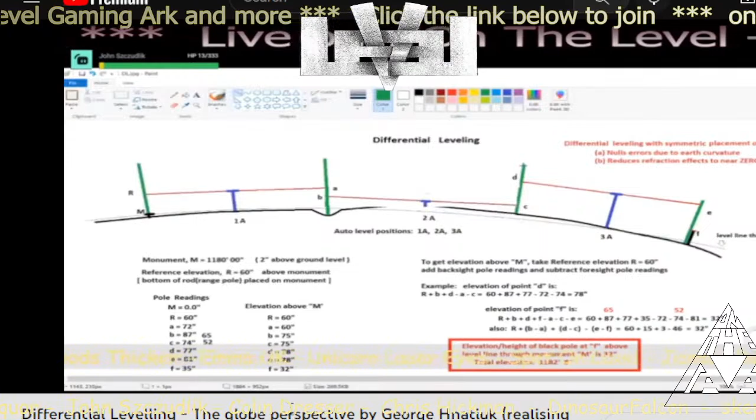That's how I understand it in reality, down here. Yeah, this is, now each of these readings will change by the same amount. If this pole moved from here to here, I would think it would be 10 inches, then both the backsighting and foresighting, because don't you have to go up and then down and then down and then up the curve?